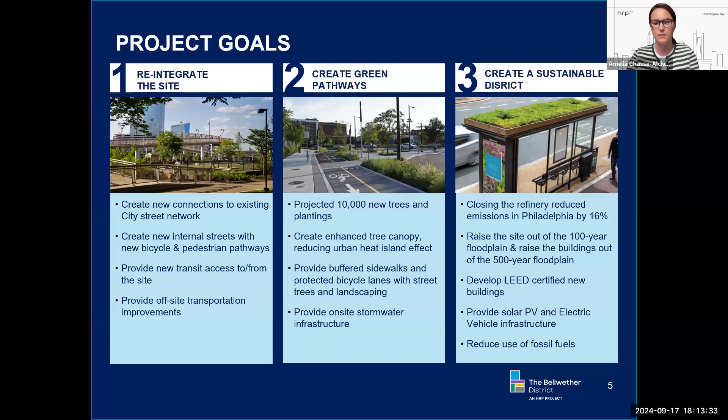Next slide, please. And with that, I'm going to hand it over to my colleague, Blake Rowan. Oh, excuse me, I'm actually going to do this slide. I'm sorry, guys, I don't usually moderate this meeting.

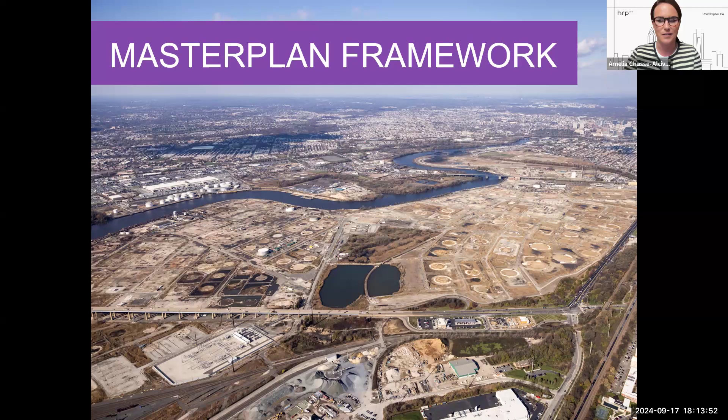Master plan framework - this is my last slide for this portion. This picture is interesting for those who've seen the site for years, where you can see the circles where the tanks were, but they've all been removed. This is an overview of our master plan. We want to always present this at every meeting so everyone knows what we're planning to build. This is also available on our website.

In the north, we're planning an innovation campus, 250 acres, looking at technology, life sciences, and innovation industry users - 3 to 4 million projected square feet, with a more campus-like feel and smaller building footprints. Based on our third-party economic impact study, that's projected to create about 8,500 jobs.

Then to the south of Passyunk, we have the logistics campus - a larger parcel, 750 acres, projected about 10.5 million square feet, and commensurately a large number of jobs, 10,500. Go to the next slide.

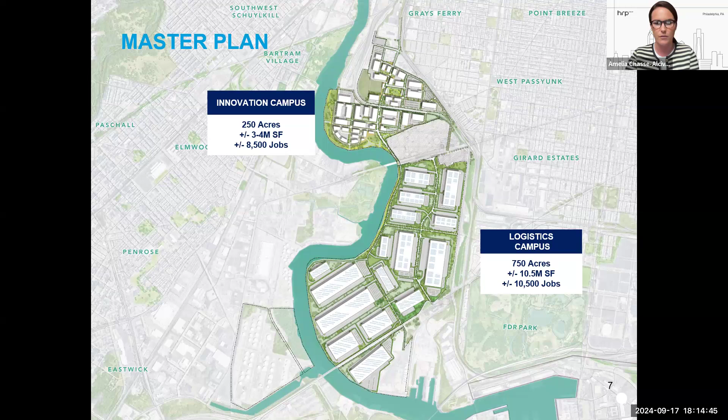Now it's my pleasure to introduce my colleague, Blake Rowan, who will walk us through the latest with the logistics campus. Thank you, Amelia, I appreciate it. Good evening everyone, I'm very happy to be here.

It's been quite the quarter since we spoke last. We've made a ton of progress on the logistics campus and throughout our site in total. The image to the right is our logistics campus that Amelia just went through. Within the red outline is where we're focusing our mass earthwork operations for the first phase of industrial vertical development. What's shown in blue is what we're currently permitted to move earth on - about 447 acres out of the 750 acres on our site.

We'll go through some interesting statistics in the next slide, but one thing to touch on here is that in the northeast portion, which is geared toward our first building and subsequently our second building, we've completed mass earthwork. That area has been turned over for future development.

By the end of this year, everything shown in blue will be substantially complete, and we'll be ready to start our second phase of mass earthwork, for which we're currently undergoing the permit process in the light tan shaded areas. We're eager to get started and hope to complete mass earthwork in those areas by the end of next year.

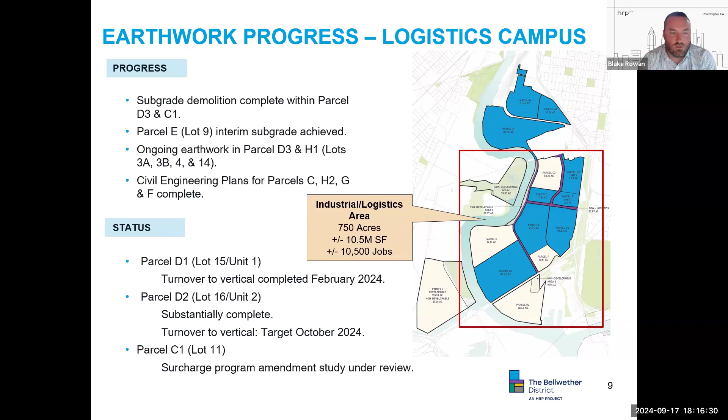Regarding these statistics - a tremendous amount of underground demolition occurred prior to our ability to start mass earthwork. We've removed to date approximately 83 miles of subsurface utilities that previously ran from the refinery units, providing water and sanitary service throughout the site. We've also removed 32 miles of existing utility pipe - just incredible volumes there.

From an earthwork perspective, we've moved about 1.7 million cubic yards of material, which is an incredible amount this year. We're getting close to the halfway point on the industrial site that I mentioned.

Just tremendous progress. From a stormwater perspective, we now have the ability to hold about 45 million gallons of stormwater in our new sediment basins, which we developed through a pretty lengthy process with PADEP and PWD. That water is managed on site locally, then treated through a temporary treatment plant, and discharged to the Schuylkill River in accordance with our temporary discharge agreement with PADEP.

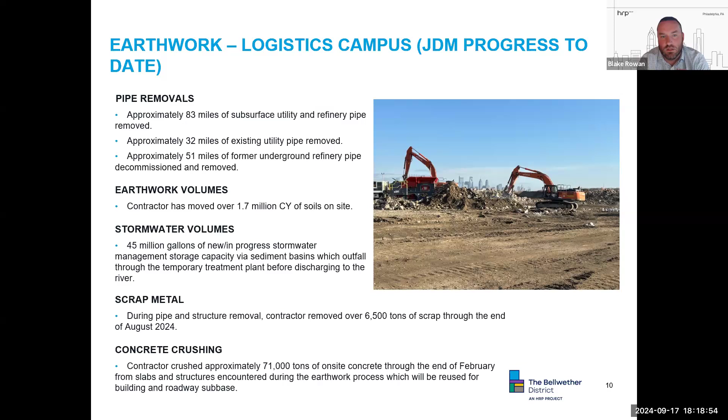Through the end of February, we've accumulated over 71,000 tons of crushed concrete that we intend to reuse for the new vertical development. If you go to the next slide, there's some good aerials of the progress that we've made.

In the outline you see, that's if you were looking at the master plan or lot 14, that's a large, over 1 million square foot warehouse where site work is actively going on today. Hopefully it'll be complete by the end of this year.

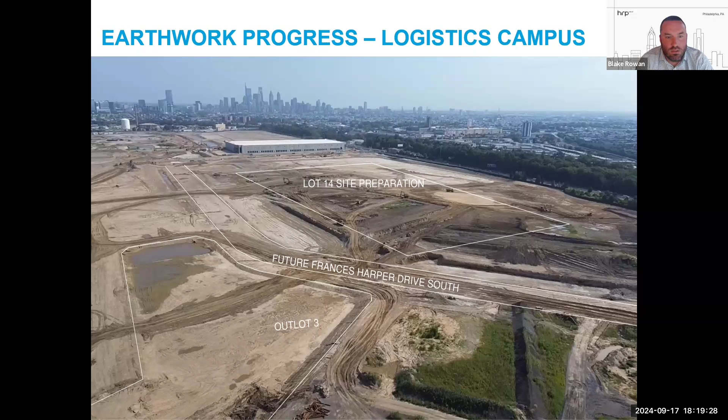As you see the outline of the new roadway, that is our South Frances Harper Drive. We have not started the actual infrastructure work on that yet, but we have completed a significant amount of earthwork there. If you go to the next slide.

This is the vantage point of our Girard Point area of the refinery. That is the Platt Bridge that you see there. As you can tell, a significant amount of earthwork has been placed, and we're starting to take shape on those new building pads for the future development.

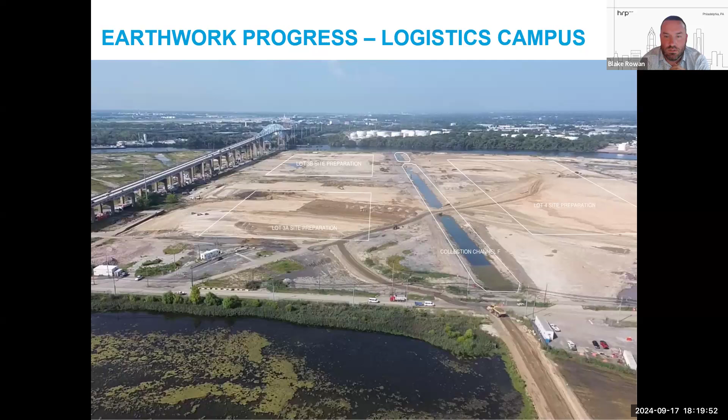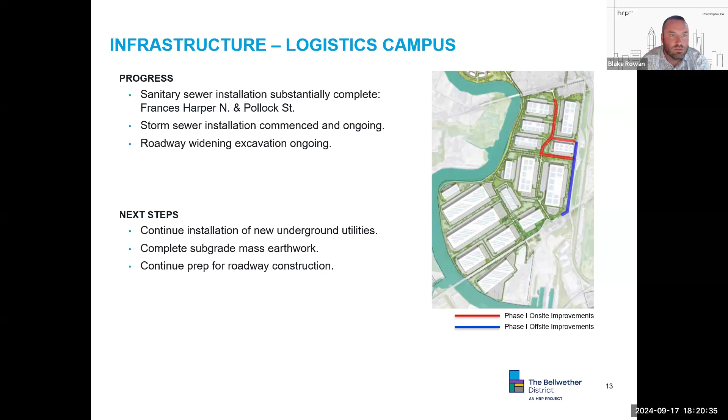Just a ton of progress. If you go to the next slide, you'll see some aerial photos. This is our North Frances Harper Drive.

To the right, the image is our Unit 2 building, which we'll talk about shortly. As you see, we're working on some underground utilities, getting those placed. The limits of the two white lines you see will be the approximate area where Frances Harper Drive will be placed, and we hope to have that substantially complete by the end of this year as we work on finalizing the offsite infrastructure.

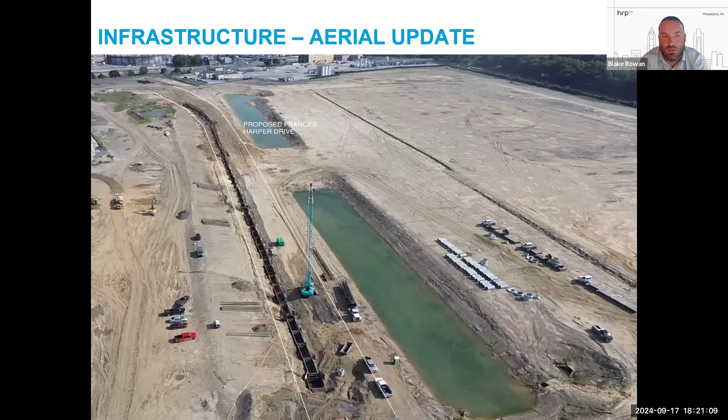This is a really cool rendering that I think we've shown in the past, but it's great to always look back. The intersection we're doing at 26th Street, this is what we hope to see in the next handful of years. Obviously today a lot less trees, but we are committed, as Amelia said, to plant over 10,000 trees on the site. We really think that in the next 5 to 7 years, this is what we hope to see as we look from Hartranft into our site.

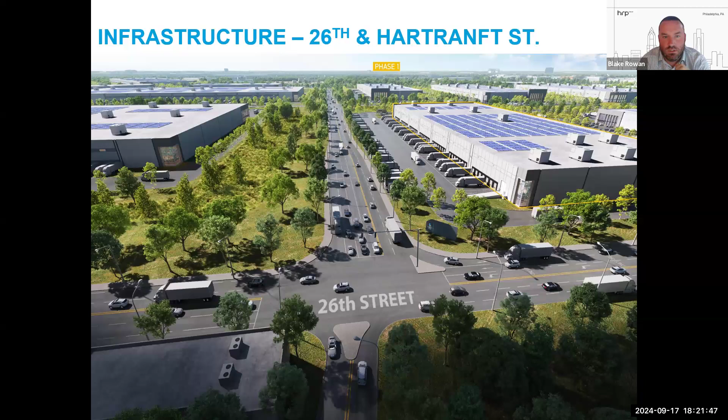Just really transformational. So our first building has made great progress. We've talked about it in the past, but that's a 326,000 square foot cross-dock logistics building currently being constructed by Clayco and Perryman Construction. We are full steam ahead, and we hope to be substantially complete by the end of this year.

We hope to bring some exciting news in the near term about potential tenants to take this building. As everyone's aware, we've built this on a speculative basis, meaning without a tenant, but we think we have a Class A product here that'll be available come the first of the year.

Here's some progress photos of inside the building. Believe it or not, given the speed of construction, these are really outdated already. We've poured about 250,000 square feet of building slabs, so it looks different today than in these pictures. But as you can see, just a shell warehouse, very large scale. It'll come fully lit, with over 93 dock positions and a full dock overhead door package.

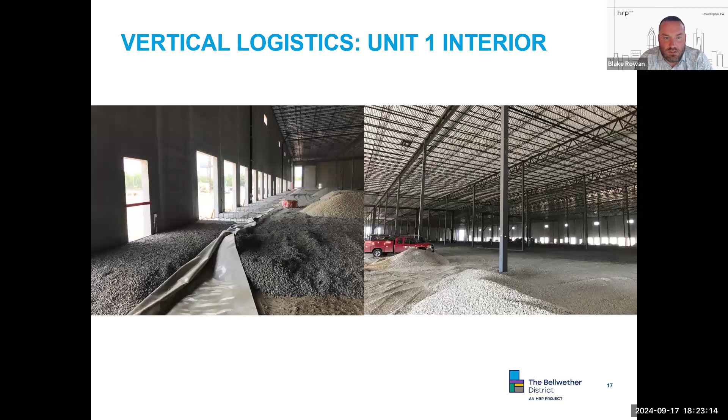Really exciting. There's a handful of other pictures here - I believe this is some progress on our electrical room, which we think is above market. The base building will have about 4,000 amp service, but it's expandable to over 12,000 amps, which is great for a handful of different tenants and different operations.

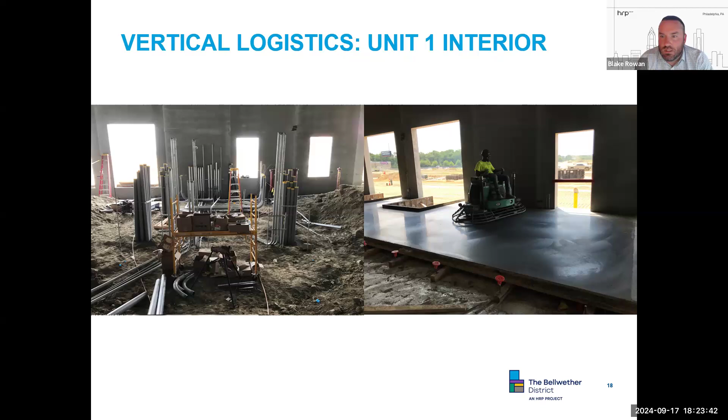And then just a quick progress shot of one of our speed bay areas, getting the slab poured there and finished.

So our vertical progress on Unit 2, we are fully permitted, and we were as of our last public meeting, or we're getting very close. We are nearing the finish line on our construction loan financing, and we're very eager to get started on that building. That's a 727,000 square foot building, which is well over 2 times the size of the first building.

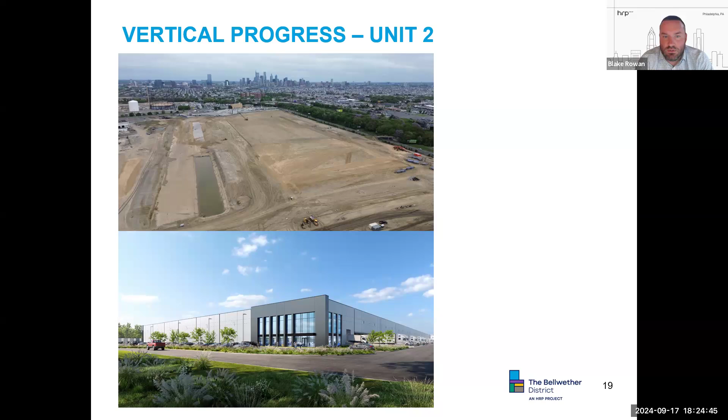It's set up to be a dual tenant type, so there's going to be an entrance on the north and the south end of the building, which we think will attract potentially more than one tenant to take use of this. Once we get started, we'll be moving full steam ahead, similar to the first, and we hope to have that completed by the third quarter of next year. So really excited to get started with that one and bring the first phase of vertical development to life on the logistics campus. And then I think the next slide is innovation.

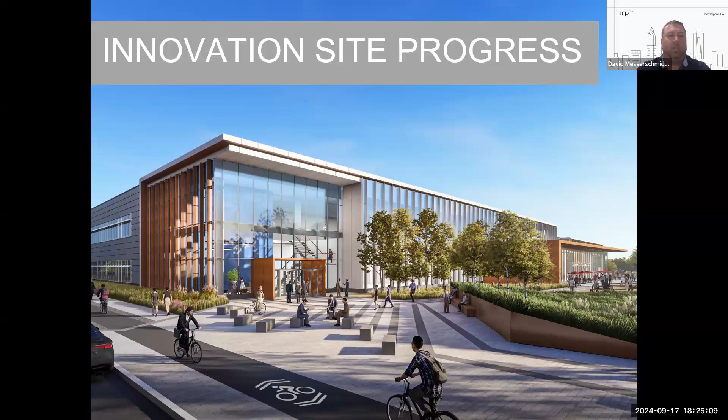Hey, how's it going, everybody? Dave Messerschmidt on the mixed use team for the Bellwether District, kind of overseeing the day-to-day operations associated with the mass grading of the innovation campus, which is the 250 acres north of Passyunk Avenue on our site.

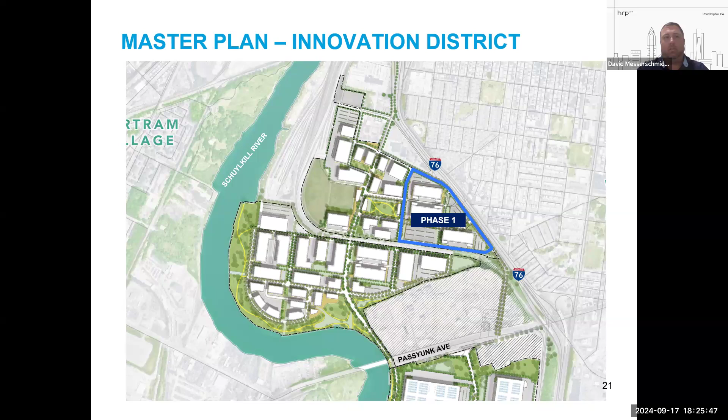So if you want to go to the next slide. This is a close-up of that first phase of vertical development. So we have 3 speculative CGMP type buildings, which are commercial good manufacturing practice buildings, slated for development within about 40 acres of space, with a road network consisting of Forten Way and Jackson Street, as well as service drives to get to docks on each of the buildings.

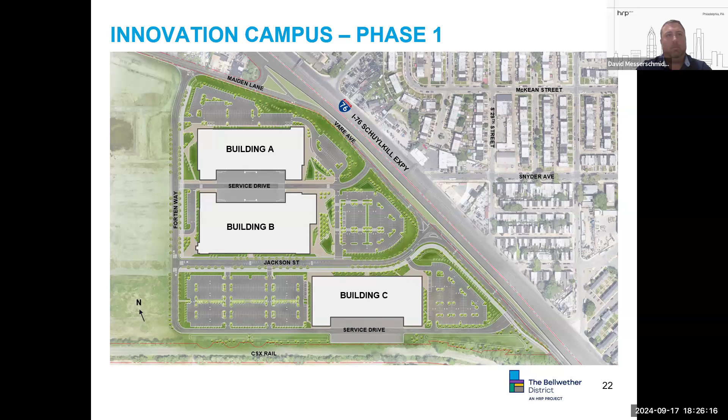Earthwork progress thus far. So we did start subsurface demolition in March of this year, and we are rapidly approaching completion on that. Mass grading began in May of this year on parcel A as well, and again we are rapidly approaching completion of that. Hope to be done within the next 6 to 8 weeks.

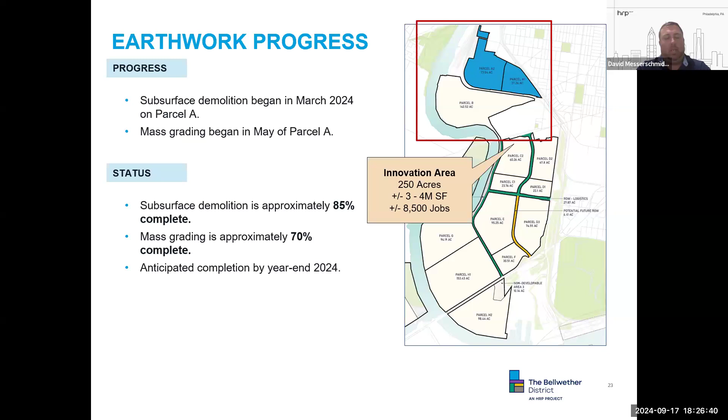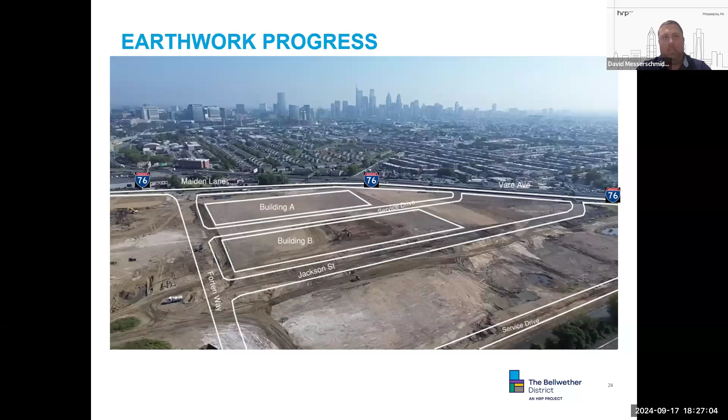Aerial here with some of the line work associated with the road network and the first 2 buildings, building A and building B. Building A along Maiden Lane on the northeast corner of the parcel there, and then you can see Vare Avenue and then 76 in the background, and then further in the background, obviously Center City. So tremendous progress from what it used to look like.

You can kind of see the surcharge pile here, which is a ground improvement method that's currently slated for building A and B. It effectively mimics the weight of the loading of the future building to prepare the deep soils for that loading when we do go to start vertical construction. So we hope to have approval from the geotechnical engineer to remove that surcharge pile in the near term. And then once we get ready to start vertical development, we'll start removing that soil in accordance with that need.

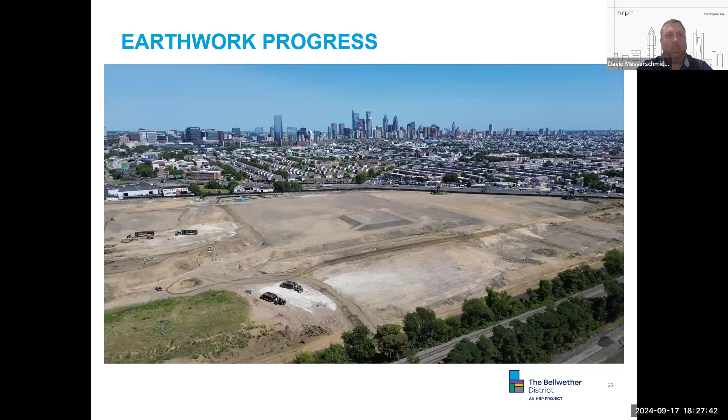The next slide. This shows kind of the northwest corner of parcel A, which Maiden Lane is up there and intersects with 34th Street, which then goes up to University City. You can see a stormwater basin kind of in the distant background there that captures all surface runoff and then conveys the water down to existing assets that treat the water before discharge to the river.

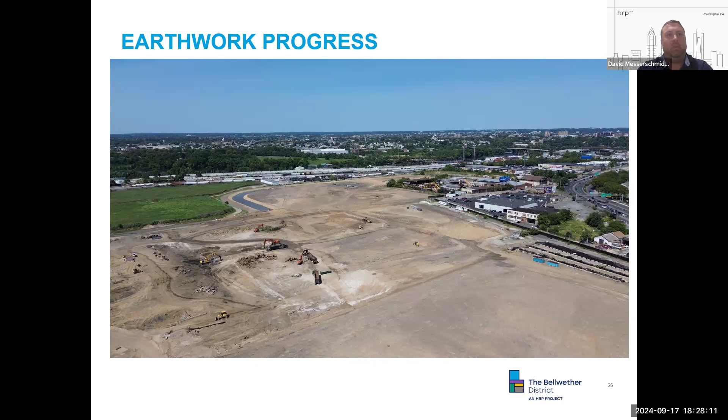Some of the milestones that we've hit so far, we've removed approximately 160,000 linear feet of underground pipe. Out of that, approximately 90,000 linear feet was unknown refinery pipe. We've moved around 250,000 cubic yards of soils on site. Stormwater volumes, we have about 1.7 million gallons of new or in-progress construction stormwater capacity being constructed to control the stormwater as it's introduced to the surface.

As far as scrapping goes, we've recycled over 2,100 tons of metal piping thus far. And concrete crushing, we've demolished around 30,000 tons of concrete, and we're working to set up the future crushing and reuse of that material on site.

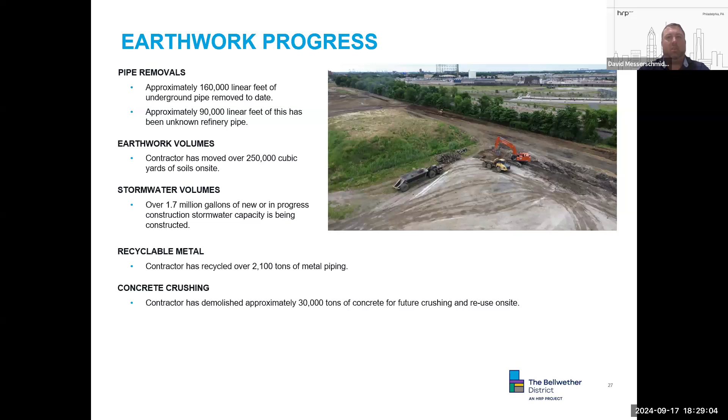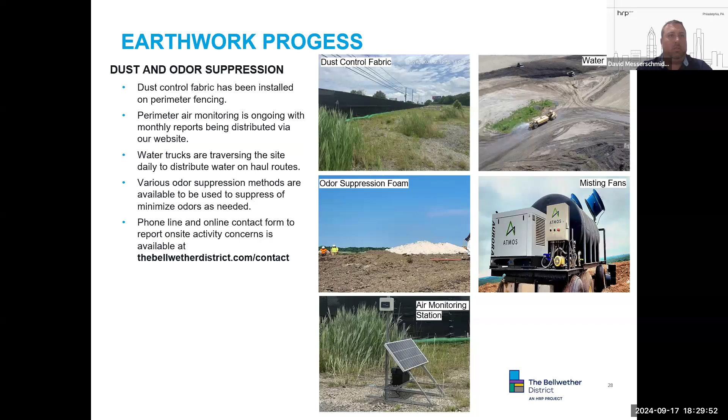We always like to start our environmental updates with a reminder that there are two responsible parties at this site when it comes to environmental sampling and cleanup. Sunoco, also known as Evergreen, is responsible for contamination from releases that occurred prior to September 2012, which is when they sold the site to PES. Evergreen is doing the remediation work under the PA1 cleanup program, which covers state regulations such as Act 2 and federal regulations. We, HRP, are responsible for releases that occurred after September 2012.

Some of you may find that date a little strange as we acquired this property in 2020, but we took on PES's environmental responsibilities as part of that deal, so that is why the 2012 date applies to us.

After demolition, we and Evergreen were able to sample in areas which were previously inaccessible. Evergreen was responsible for sampling beneath the refinery process units, and we were responsible for sampling beneath the above ground storage tanks. We are also responsible for the management of soil in accordance with our 2020 soil management plan, which I'll get to in a few slides.

And we're responsible for vapor intrusion assessments in new buildings on our site. As Blake mentioned, our first building is under construction, so I won't get into the vapor intrusion details in this meeting, but we will likely cover that in our next quarterly meeting.

As you can see here, HRP has 8 distinct release areas that have been entered into the Act 2 program. HRP does not have one site-wide case. Reports and regulatory correspondence for these 8 cases are available on our website.

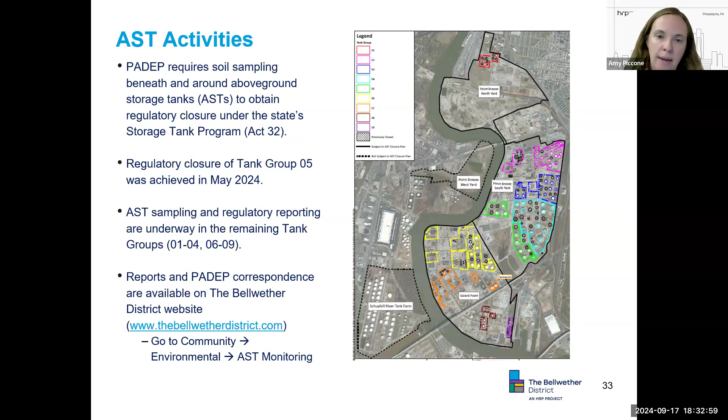We have a soil management plan, which was approved by PADEP in 2020 and is available on our website. Some of you may be familiar with this. We've talked about it at other meetings, but that document outlines our plan to collect 1 sample per 2,000 cubic yards of soil that was planned to be moved within our site. We then categorized a given cell based on that analytical data and then handle that soil appropriately during earthwork. For example, the most contaminated soil is placed under impervious cover, such as the building pad or parking lot.

The majority of the soil sampling is done, and the data are summarized in soil management plan addenda, which are on our website. Currently, we have an environmental consulting company overseeing the earthwork to make sure the cells are placed in accordance with our soil management plan.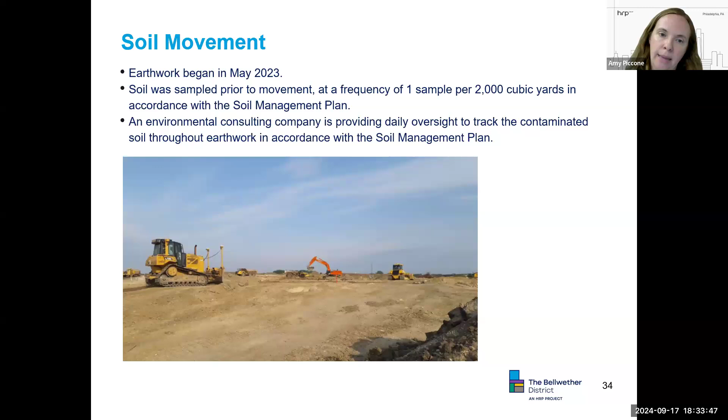Finally, I'll elaborate a little more on the air monitoring that Dave mentioned. So we currently monitor for particulate matter, which is also known as dust, and we monitor for volatile organic compounds, which includes chemicals you would find in petroleum products such as benzene, xylene, toluene, etc. We monitor continuously and receive alerts when concentrations are elevated, so we can take action in real time.

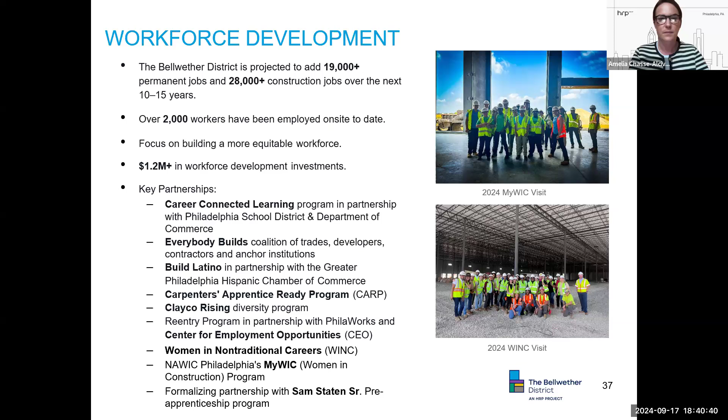Wanted to do a deep dive into career connected learning in this meeting, because we just finished our largest summer internship program to date, our first year of having 50 interns. When you think about the fact that our local team is about 25 people, that number gets big. This is a partnership with the school district and the Department of Commerce, specifically for School District of Philadelphia students, and we also open it to other local schools like Audenried Charter School. We have employed over 120 interns to date, and had 50 this summer. We also this spring did our first middle school spring break internship, giving middle school students a little taste of what it's like, so hopefully they can join us when they're in high school.